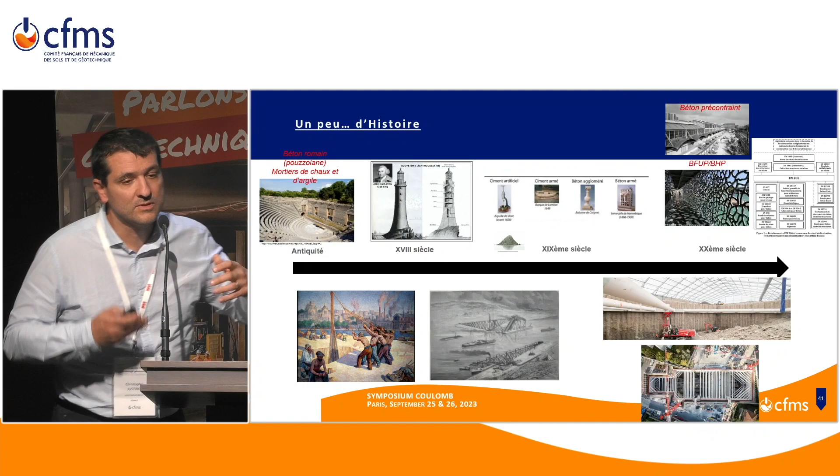Okay, le béton, Roman Empire concrete. So you might have seen that. So I saw - rather than speaking about history, just saying that I've been spammed by all my colleagues because they know that I'm head of materials for Soletanche, and they say, but why aren't we using this self-healing Roman concrete? Is it something new for us?

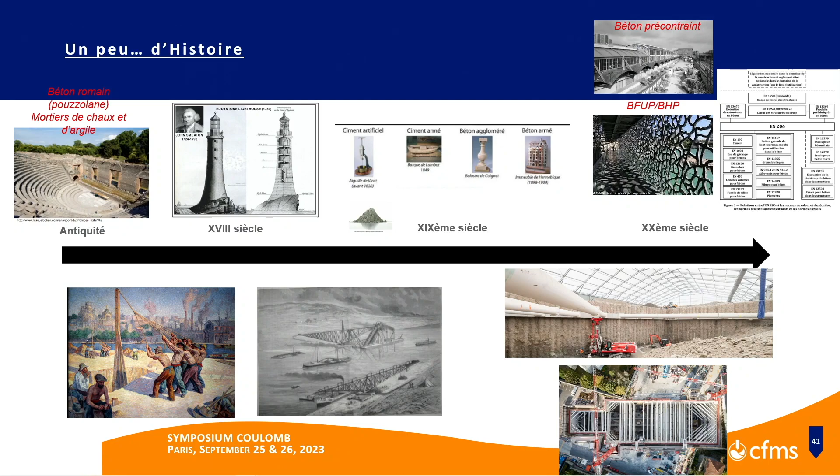So I wanted to take the opportunity to say that yes, Roman concrete was very durable because we can still see the structures. But in all the articles that I've seen about that, there was an important mention. It's saying that nowadays the concrete we are using is more durable than Roman concrete, and this is for all the reasons I'm going to show you, because there are standards, there is specification on concrete. So yes, Roman concrete was very good.

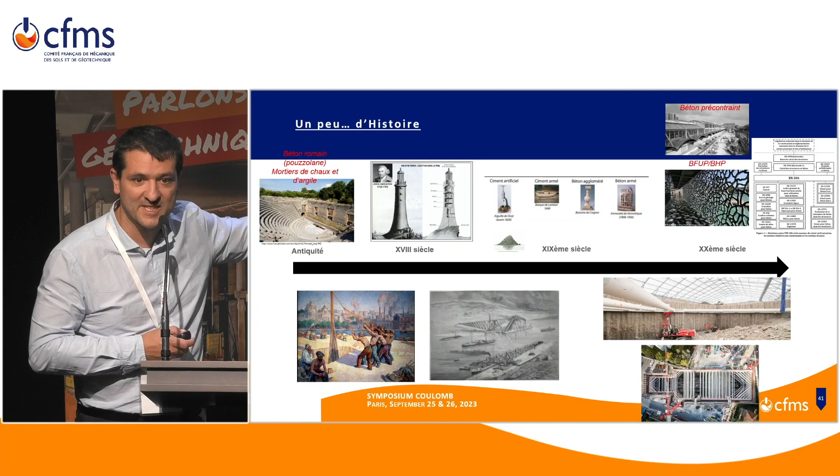It was in a way not using Portland cement because it didn't exist, but it was using the same principle - quick lime, pozzolan, all the kinds of things that we are using now. It was not necessarily lower carbon emission than what we are using, but it was interesting to say that it exists. Astonishingly, between antiquity and the 18th century, there was no concrete, let's say.

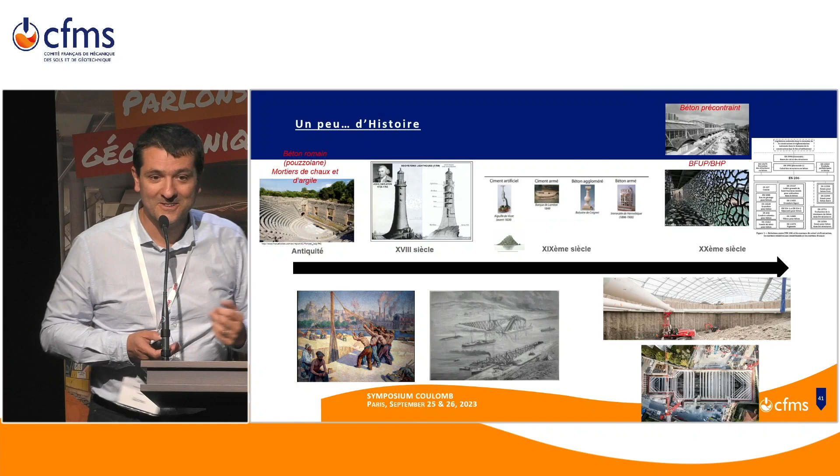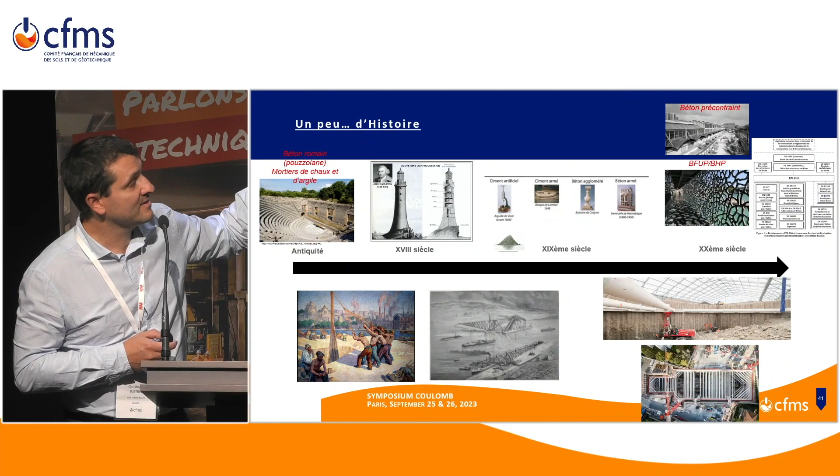It was rediscovered. And the discovery of concrete obviously allowed a lot of development up to now - pre-stressed concrete, very high performance concrete that allows us to do retaining structures with reinforced concrete, going very deep.

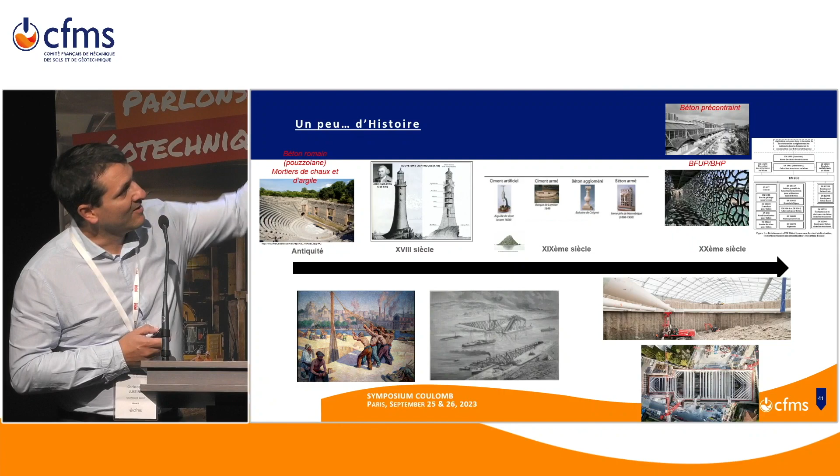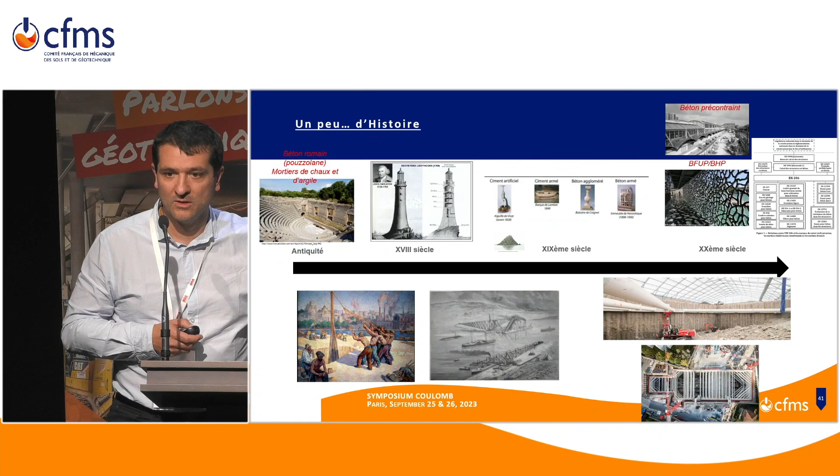And the last thing that is like the chart is what I wanted to do - keep in mind that concrete nowadays is governed by specification. There are a lot of standards on all the constituents for concrete. And that's also the reason why we can now produce more durable concrete and higher performance concrete.

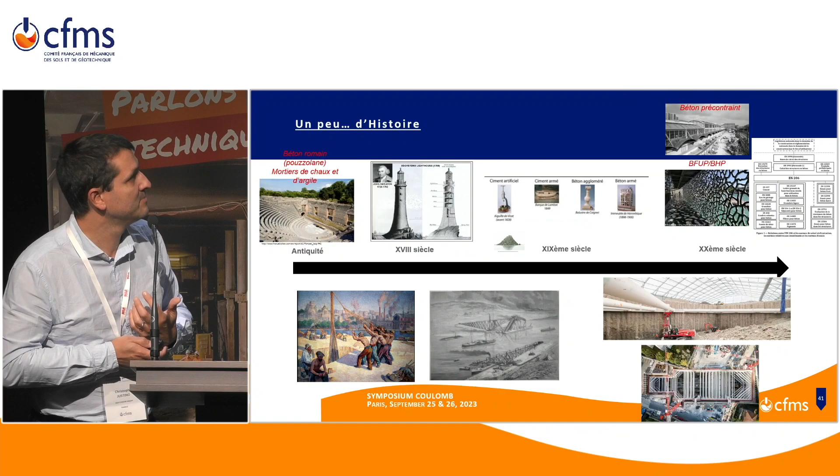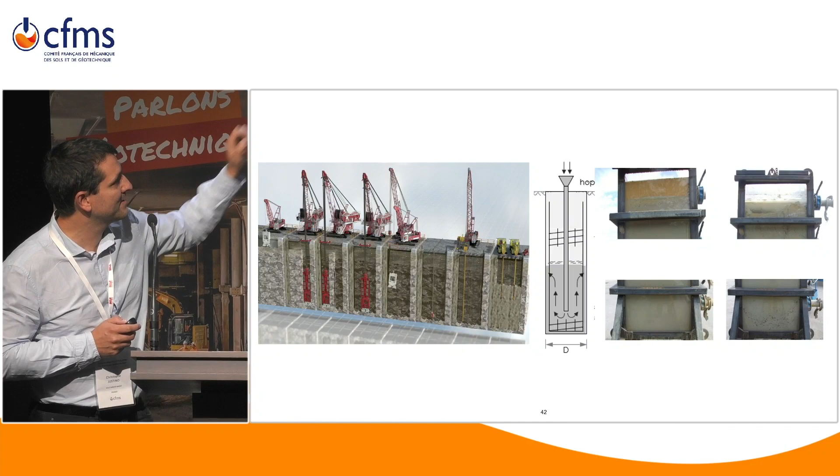Okay, so now if we go to concrete in geotechniques, in order to explain why it's so specific, concrete in geotechnique, we need just to go back on the way we pour concrete. So we have some slides just to re-explain. For those who are not specialized in this kind of diaphragm wall deep foundation concrete, once we have used the magnificent tools, hydrofraise, grabs, in order to go as deep as the project requires, that we have perfectly controlled the support fluid with the nice equipment, and that we have put in place the reinforcement into the trench.

We use a tremie pipe that goes at the bottom of the excavation, and we pour the concrete from the base to the top. So that requires, as it was explained by François, that the concrete that we are pouring needs to maintain its workability, its fluid properties, for a certain amount of time. You mentioned 10 hours. We have examples of projects where we had pours that could last for 18, 20 hours to pour 1,400 cubic meters in just one lift. So that means that the concrete has a very high requirement. On top of that, we are blind because we are pouring concrete under support fluid.

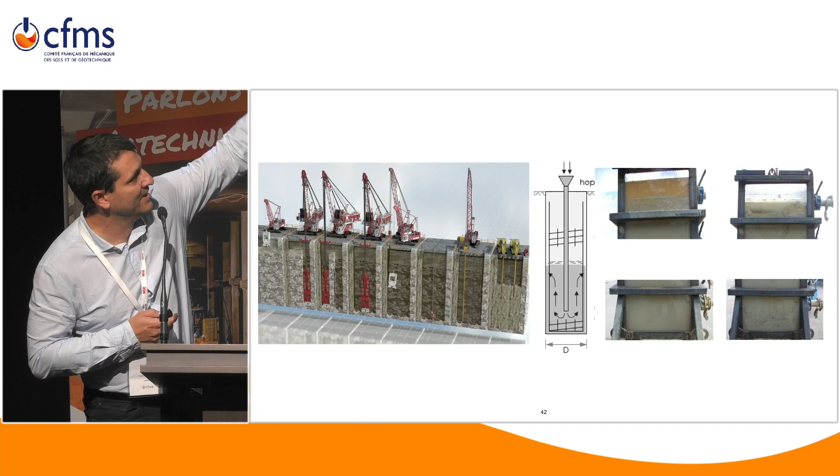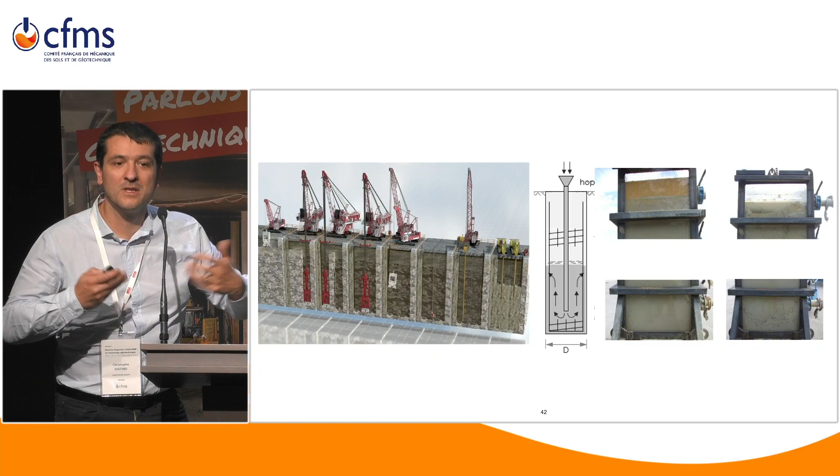So it's just an overview of what can happen. On the left side, we have what happens when everything is perfect. You can see the transition between the support fluid in brown and the gray concrete. But if we are messing with the properties of the concrete or the way we pour, we have an intermixing. The concrete is washed out at the base, at the top, and it leads to defects. The problem is that in that case, the defects will only be seen when the box is excavated, and you can imagine the impact on repair. So that's why concrete is an essential part of the success of those projects.

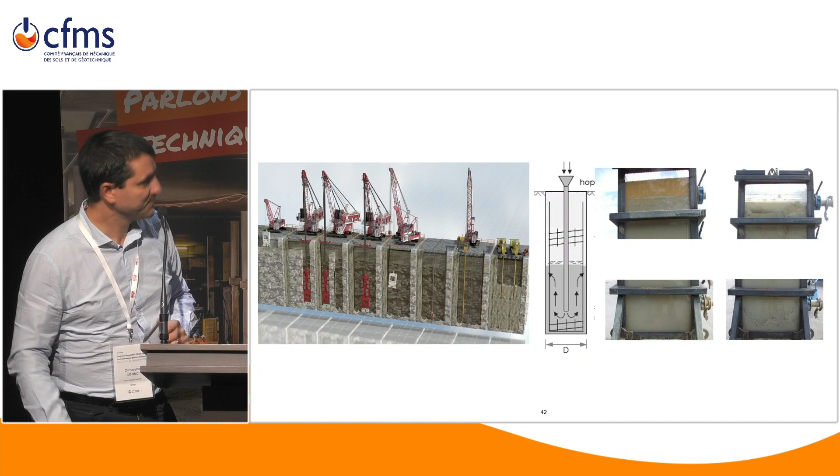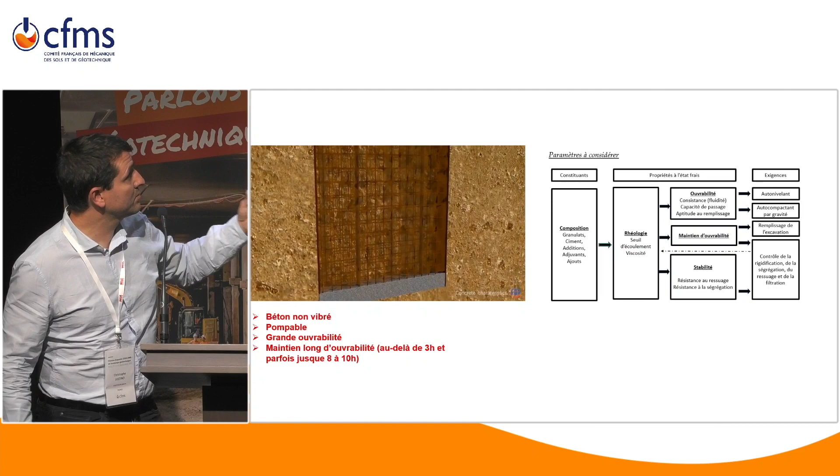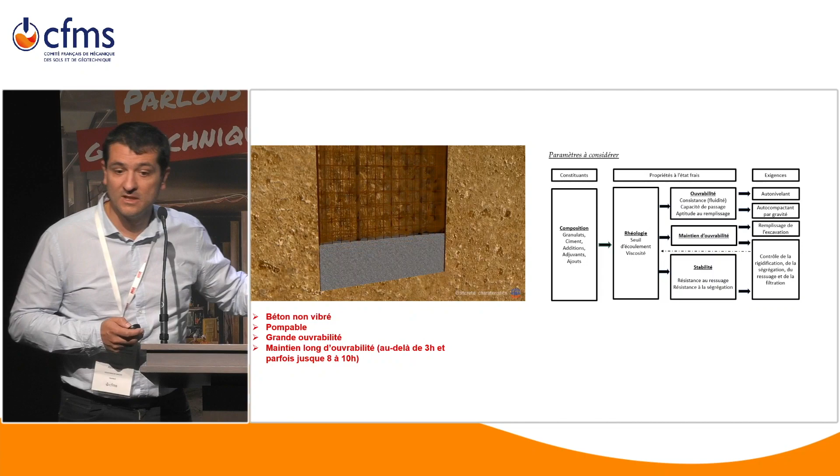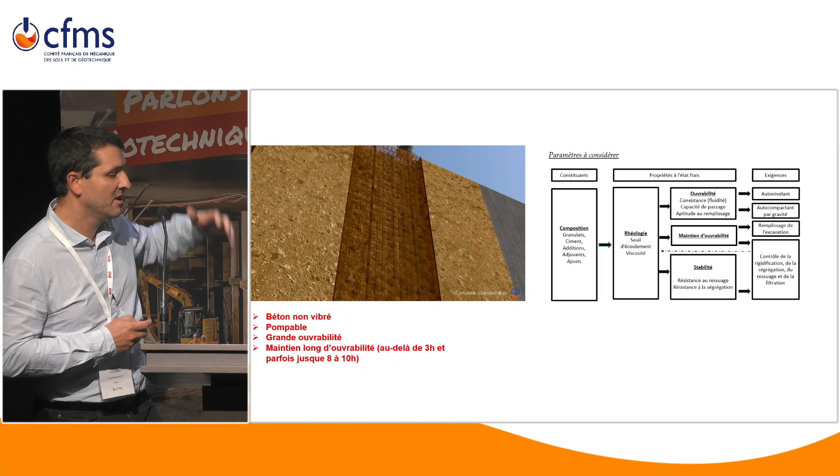Okay, and just to emphasize, just a view on how the concrete is poured. So this kind of concrete has to be close to self-compacting concrete. It has to self-level. It's not vibrated, which is not the case for civil works. We do not vibrate. It has to be pumpable, very workable. As I said, we need to maintain its workability from minimum 3 hours, but up to 10 hours in some circumstances.

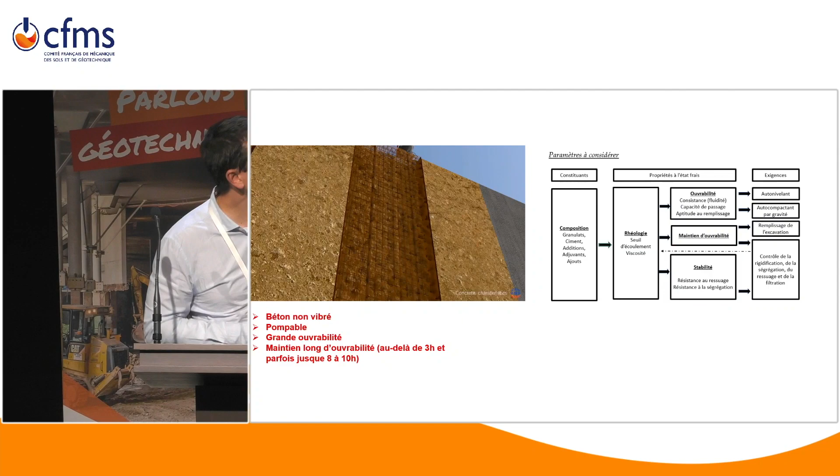So in order to do that, we need to deal with obviously the constituents of the concrete, as for every concrete, so we're still dealing with aggregates, cement, cementitious materials, admixtures, and we need to consider different aspects of the fresh properties. One is the concept of rheology of concrete. There's a need to understand perfectly the physics behind the rheology of concrete, meaning that it's a mix between what we call the seuil d'écoulement, the yield stress of the concrete, and the viscosity of the concrete. With the concept of rheology, we can access the consistency, the workability retention, and another key parameter

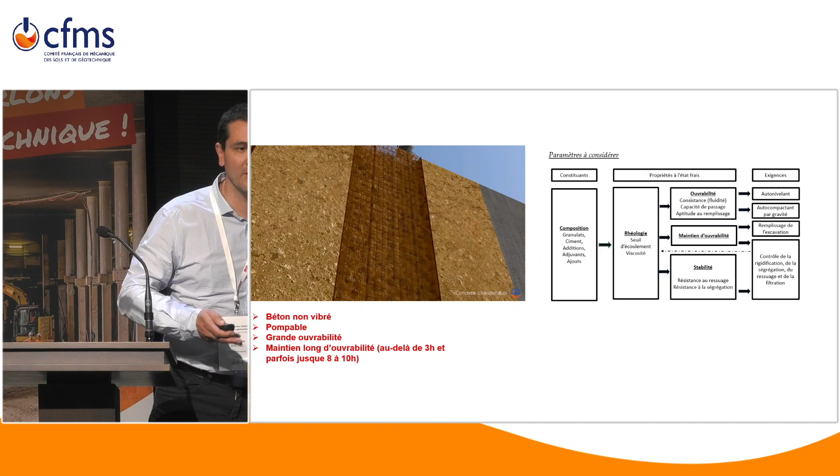that was not really a focus before 2000, which is the stability. Imagine you have 70 meters of fresh concrete. There is a lot of pressure under the concrete, so concrete tends to bleed. Some water of the concrete tends to go out, but under pressure, it can do massive damage if the mix design is not balanced properly, and we can have these very high channels of water coming out of the concrete, washing out the concrete, and impacting its durability.

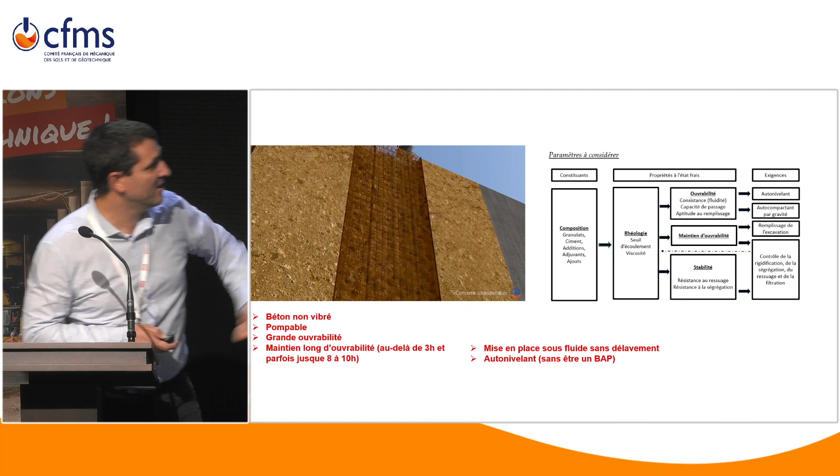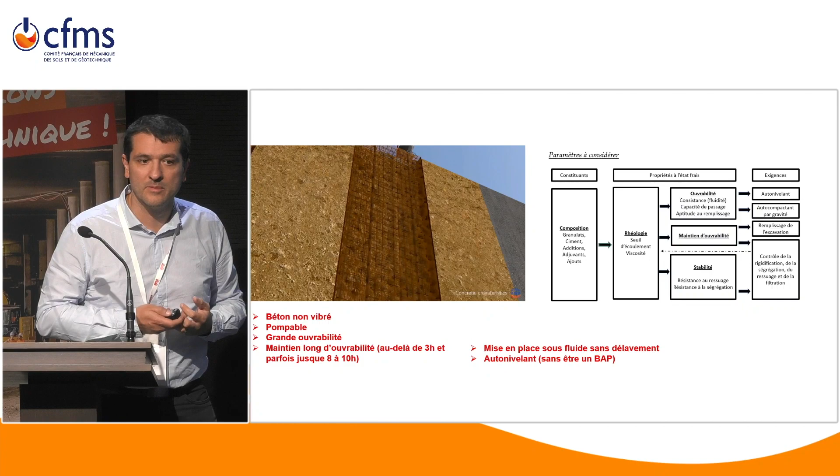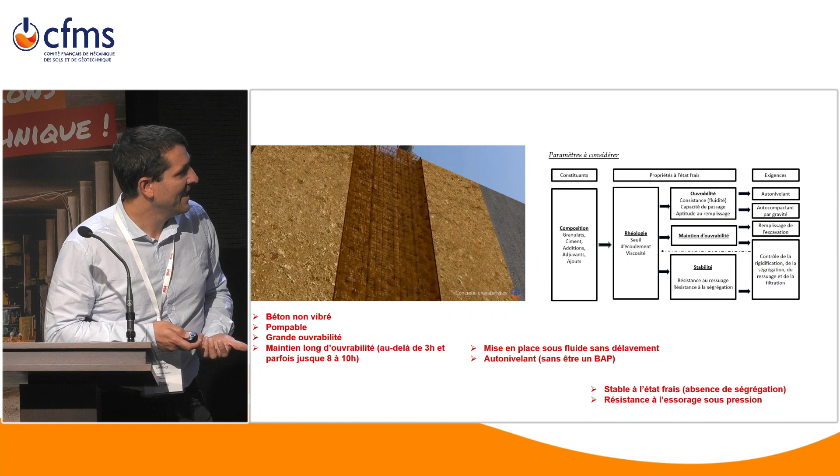So with that, we need to have a concrete that can be placed under a support fluid without washing out, being able to pass through reinforcement that is more and more dense due to the high requirements of the project. More and more we have to have concrete able to pass through very dense reinforcement without vibration. And it has to be stable, as I said, and resist pressure. So there are a lot of constraints that can't be dealt with by what I would say traditional concrete. Sorry for the mic.

Okay, so generally it's well accepted that before 2000, it was really typical to have what we call three-component concrete, meaning that the properties of the concrete were driven by the dosage of cement to get the strength, by the water content to get the fluidity, and the balance between gravel and sand. In order to face the challenges of more durable concrete, more flowable concrete, higher strength concrete, the industry has moved to what we call generally five-component concrete, where we enter the era of admixtures.

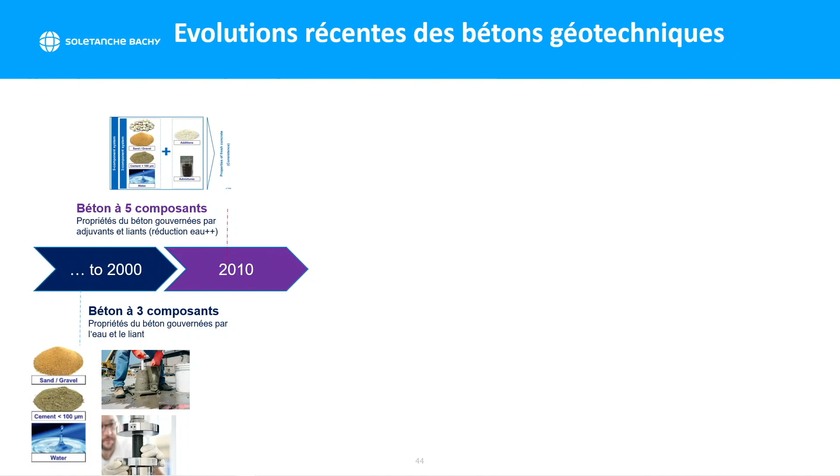And the admixtures help to reduce the water and get higher strength. But at the same time, by reducing the water, they give you concrete more sensitive to variation. And as the concrete is more sensitive, especially for geotechnical concrete, it was not enough to just test what we call the slump and the strength, because it was not enough to fully characterize the concrete that we need to pour at 70 meter depth.

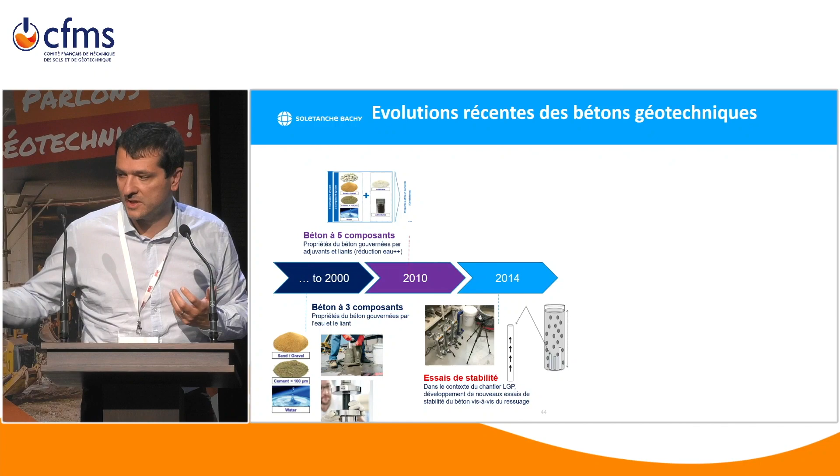So since 2010, a lot of development has been made through different standard committees, through technical working groups like the ones led by the EFFC, in order to develop new tests, first to characterize the stability of concrete. So we'll see that tests have been developed to measure the ability of concrete to retain its water.

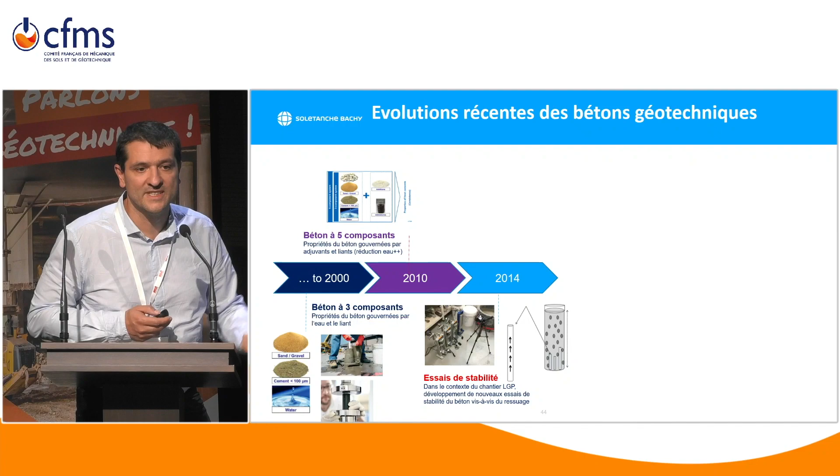Also to have simple tools on site to control the viscosity, because we cannot use a rheometer on site. It's a good tool for laboratory, but on site we need other tools. So just by using simple tools that I'm going to detail, we are now able to characterize the yield of the concrete and the viscosity of the concrete.

At the same time, we are more and more challenged about durability requirements, so we need also to develop tools to explain how the concrete places itself in the soil. So we have more and more numerical modeling of the way the concrete places itself, in order to answer one of the fundamental questions of pouring concrete: the first concrete that I'm pouring at the base, will it go up to the top, will it stay at the base, or will it mix with the other loads? Through numerical modeling, we have been able to approach that and rationalize it.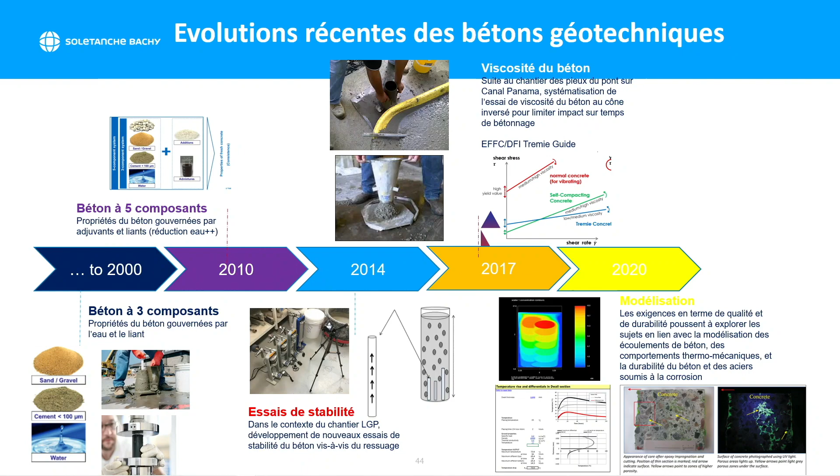And typically, for the pours that were lasting 20 hours in London for deep shafts, we never used a concrete with 20 hours of workability retention, because it would have led to a huge problem in terms of setting time. But we were able to do a 20-hour pour with 8-hour workability retention concrete, and we demonstrated that it was working through modeling.

Another issue: we are speaking about 2.4 meter D-walls, for example, in Japan. So that means that in geotechnical concrete, we are facing the same issue as mass concrete. The heat of hydration of the cement can build high temperature within the core. So there was a need to develop modeling and numerical tools to predict and also to control on site the temperature in the very large pours.

So just imagine, when I arrived in 2005, the only thing we were doing in concrete for D-walls and piles was a slump and cylinders to test the compressive strength. Now in France, most of the contractors are using at least 5 different tests on concrete. If you go to the UK or other countries, sometimes you have a list of 10 tests. Not saying that 10 is too much, but the 4 or 5 that we have retained and put into standard in France are really a change and help to increase the quality of the concrete we are building.

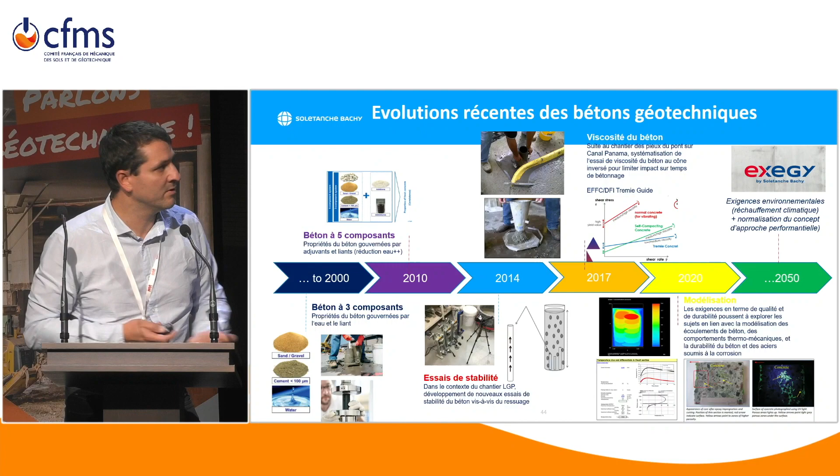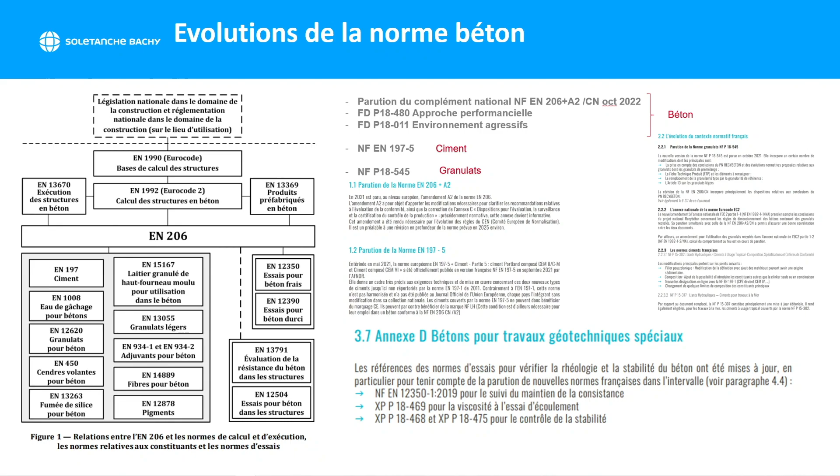So the next part is very quick, it's just for you to follow up. Important to understand, we are not going through all this, but know that the concrete standard national annex has changed this year. The main change in this national annex is introducing the possibility to use recycled aggregate from concrete deconstruction and to use the performance-based approach to design concrete, meaning that your concrete mix design will be validated based on durability testing and no longer on the minimum cement content or maximum water cement ratio.

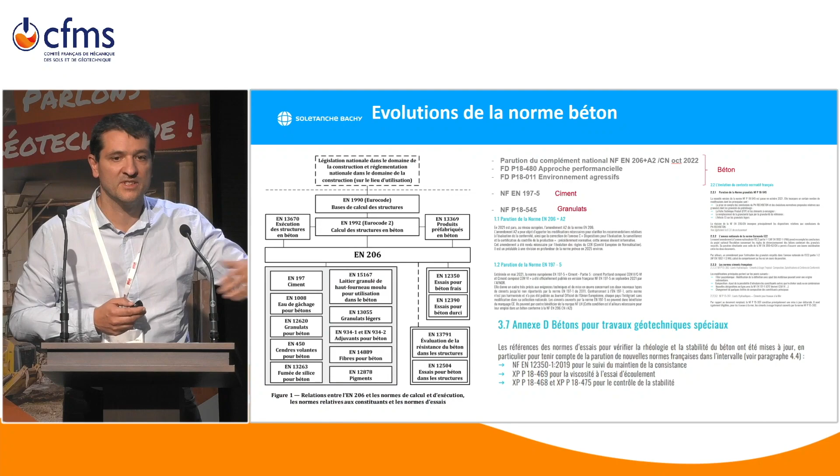And specifically for geotechnical concrete, we have added the additional tests that have been passed into standard. And those tests mainly are the flow table, the slump flow, which allow you to have a direct vision of the stability of the concrete, detect whether or not the concrete is segregating. The flow cone, which is something like the Marsh cone for grouts, just measuring the time to empty an Abrams cone to get a feel on the viscosity of concrete.

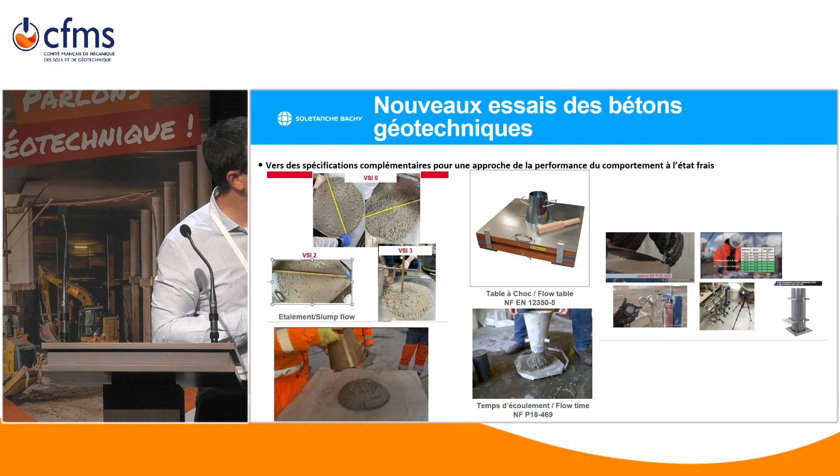It's a major impact because above the limit value that we have, generally, it can change from, let's say, discharging an 8 cubic meter truck in 5-10 minutes to discharging an 8 cubic meter truck in 30 minutes, 45 minutes, just because of the viscosity of concrete. So those are important tools.

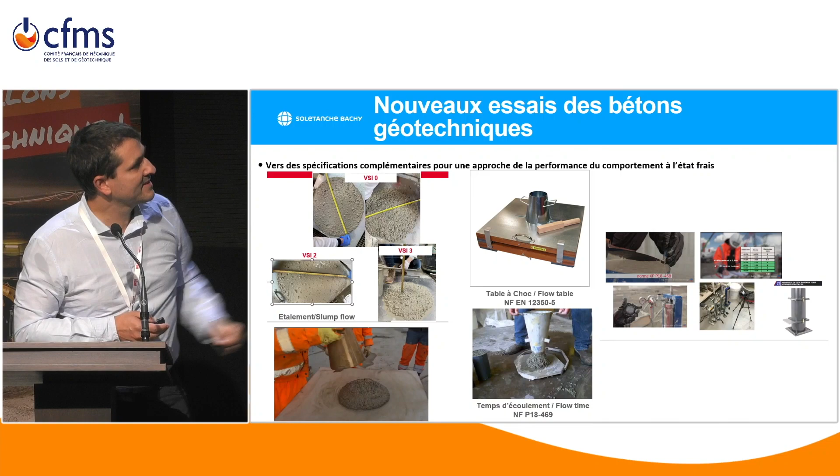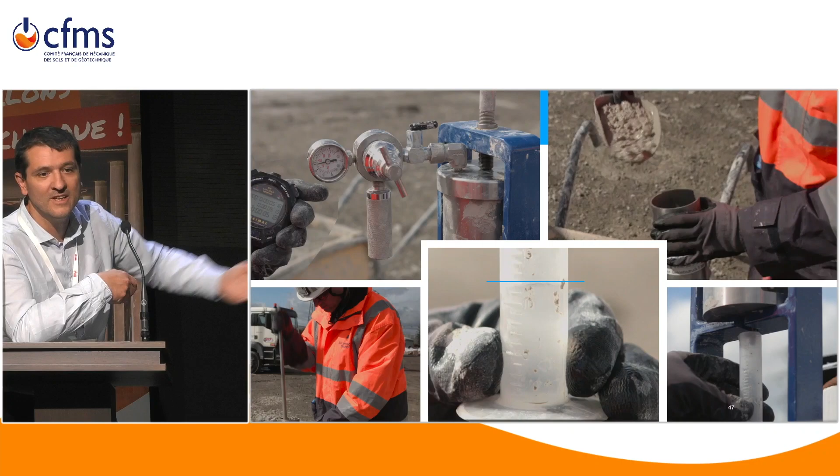Stability test, bleeding test, that helps you to measure the ability of concrete to retain its water. So in more detail, for stability, we have a filter press test; it's a very simple cell that we put into pressure, and we have a threshold value of the maximum water that should be let out. It's a very simple test that lasts 5 minutes.

A test that lasts a little bit longer because it's at atmospheric pressure, but very interesting to identify the potential for bleed channels. Those tests are typically tests that are recommended to be done before the project starts, when we do construction trials. It looks very simple. It's very simple, but it really can change things on concrete.

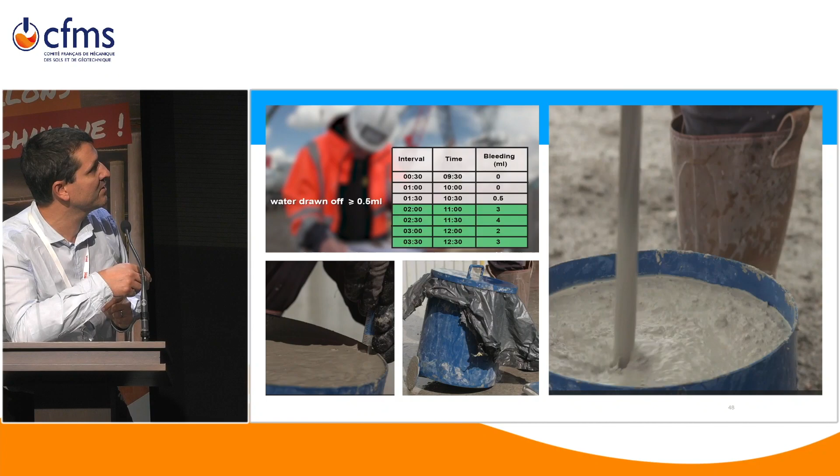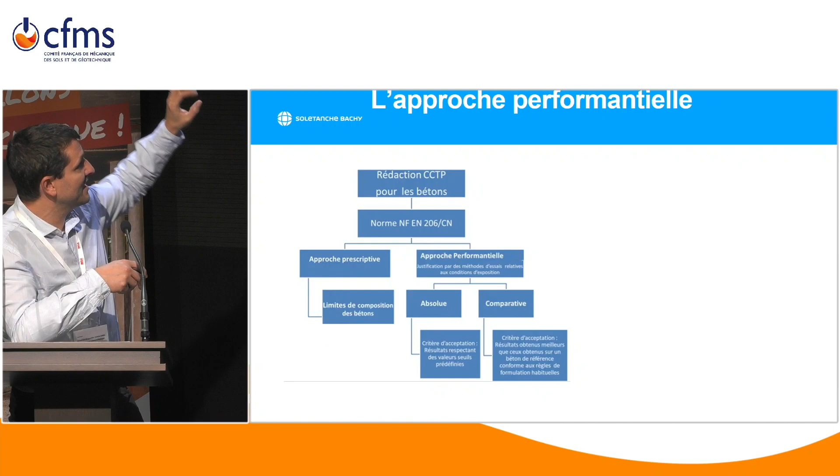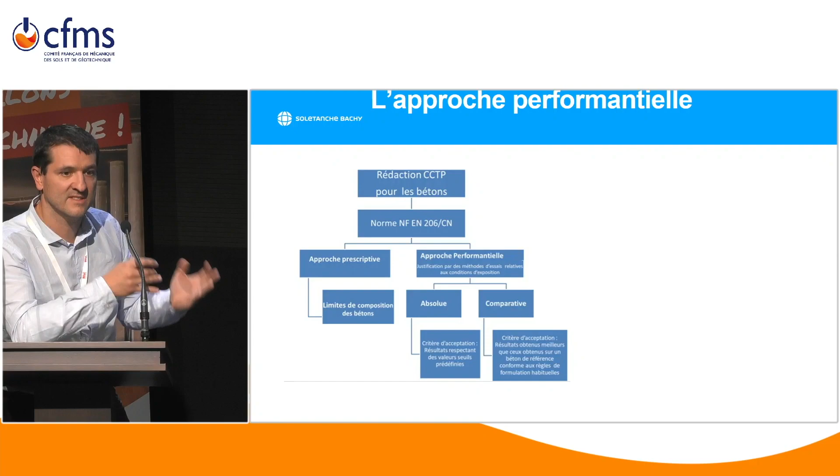The performance-based approach, it's another step. So as I said, now when you design a concrete according to the concrete standard for structural concrete, you can decide to go on the prescriptive approach. But if you want to optimize your mix and try to reduce the cement content in your concrete for economical reasons, for technical reasons, for example, for a sustainability approach, there is now a framework that exists in France, and France is one of the first countries that has built documentation, a standard that allows you to go in this direction.

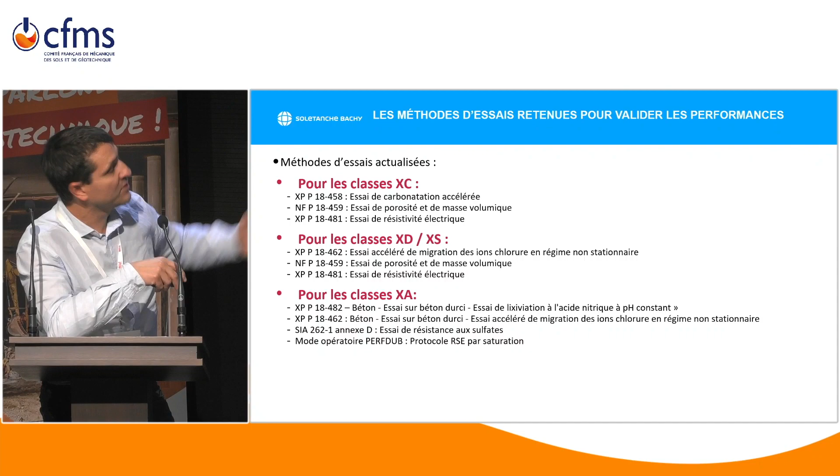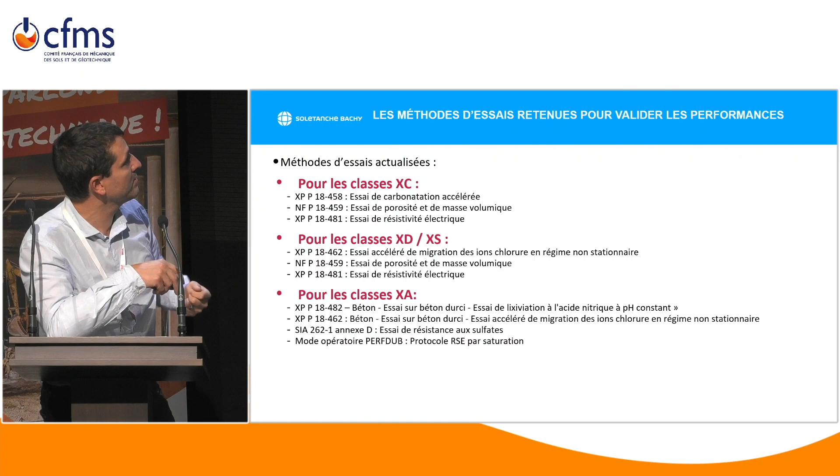So I'm going to explain: for each of the exposure classes that you are facing, you will have a dedicated test with an associated standard. For carbonation, we have accelerated carbonation, porosity, resistivity. For corrosion due to chloride, there is a chloride migration test.

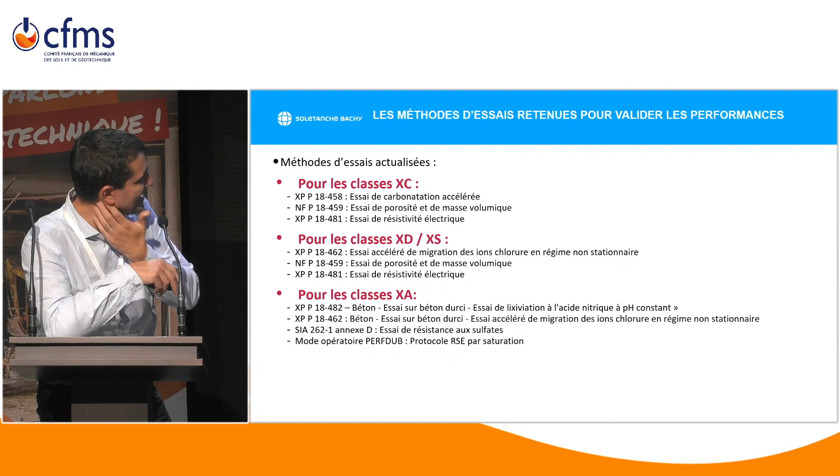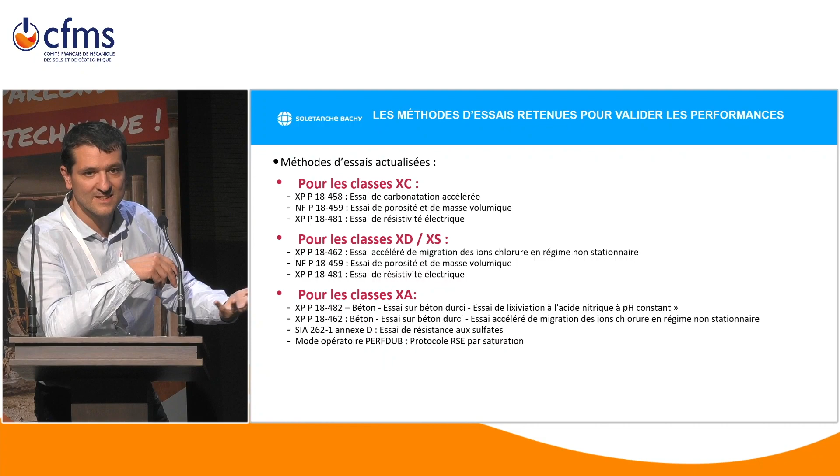And even for chemical attack that we are always facing in geotechnical concrete, because we are in the soil and most of the time we can have sulfate from the soil or things like that, we have those tests to test the risk of low pH or the impact of sulfate in order to demonstrate that the alternative mix, which is, let's say, optimized from the prescriptive approach, will give you the right concrete for your project. Okay, so that's just to show how it works.

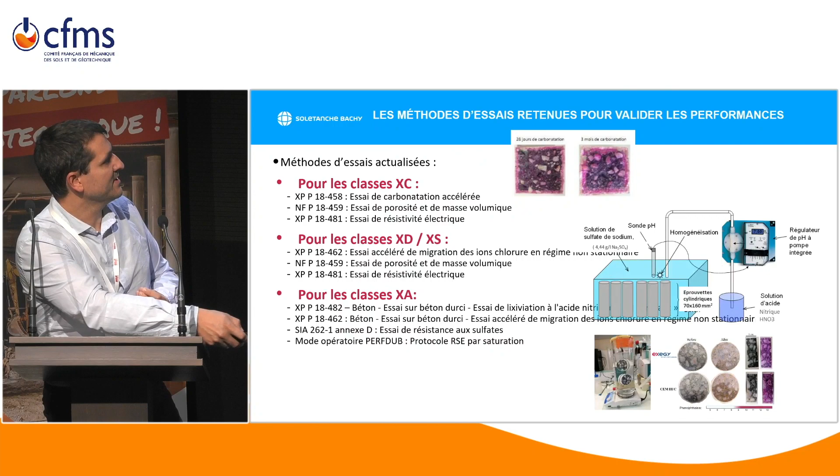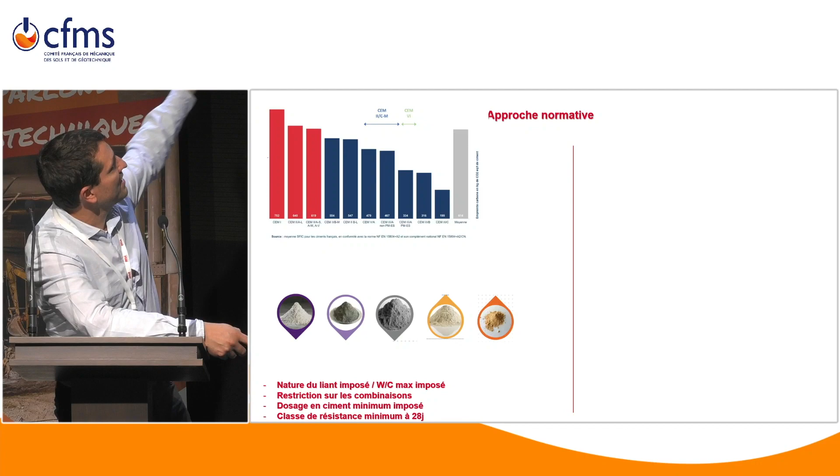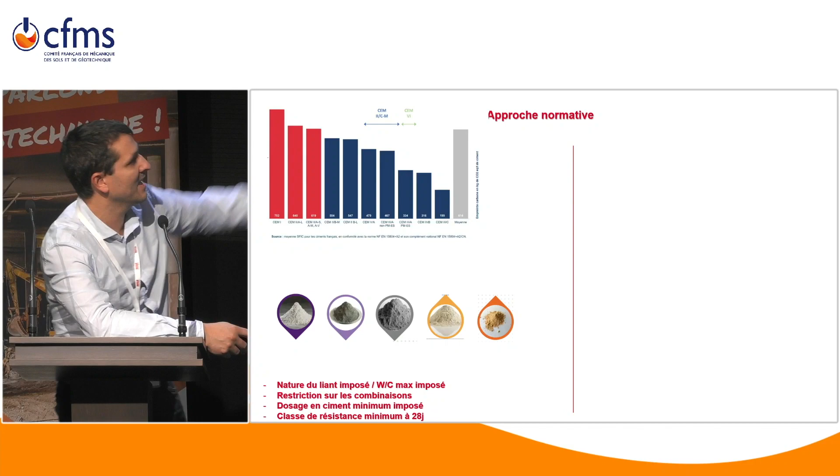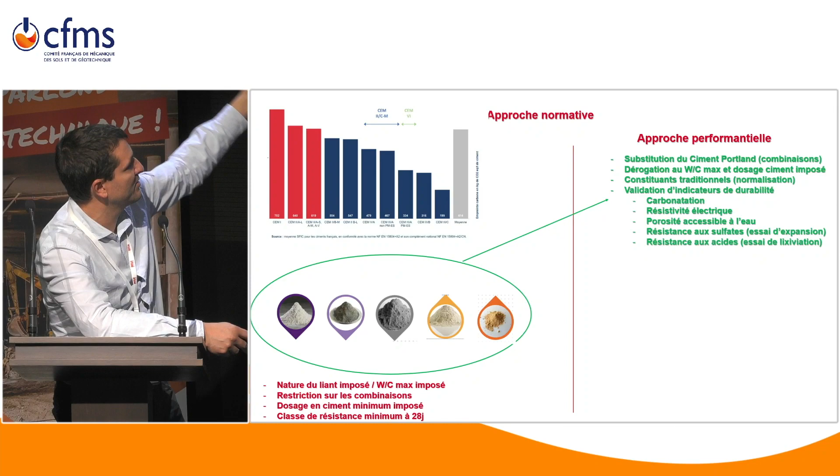Okay, so just to emphasize the interest: normally we can use the normative approach. We have a range of cements, but the binder content is imposed, the water-cement ratio is imposed. There are restrictions on the replacement that we can use, all those cementitious materials like slag, fly ash, silica fume, calcined clay, limestone filler. We have limitations. Now with the performance-based approach, we have much more room to play on the replacement of standard cement with those additions, and it allows you, through validation of durability indicators, to build a new mix design.

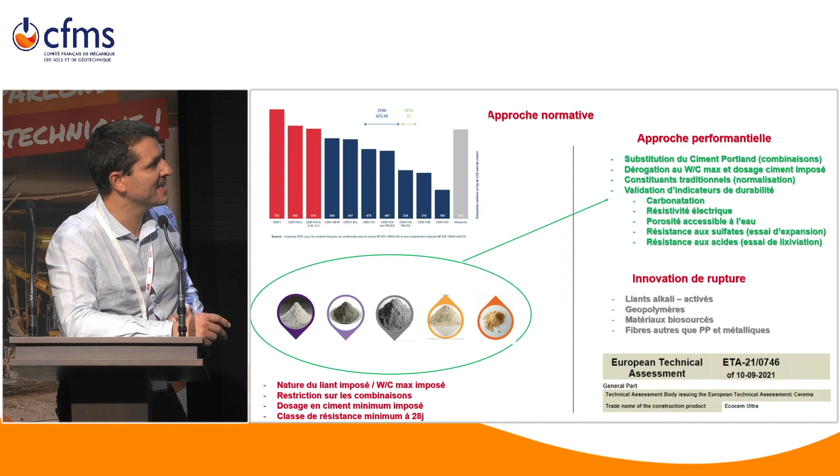Apart from that, there are a lot of new innovative components for concrete. Need to keep in mind that at this stage, they are, let's say, not according to standard. So using those products needs a European Technical Assessment. But there is a start, even in geotechnical concrete, to see alkali-activated geopolymer concrete being used.

Okay, well, this one is for you. I will just finish by keeping you informed of what is going on in terms of concrete. It's how complex it gets, but we went from a prescriptive approach; in 2022, we released the performance-based approach in the standard. And in the work now being done at the standard committee for concrete, there is a group of experts working on what we call low carbon solutions. And it's in interaction with Eurocode 2, with the standard committee.

And the idea is to identify all the steps that we need to climb, let's say, or to pass in order to continue to decarbonize the concrete industry. That's giving a framework to new materials that have a lower carbon footprint than Portland cement. That's giving a terminology, a way to define what is low carbon concrete to avoid greenwashing, for example. And also linked with the Eurocode is how to not just focus on the concrete material itself, the mix design, but the overall structure. So those are the next challenges for the future.

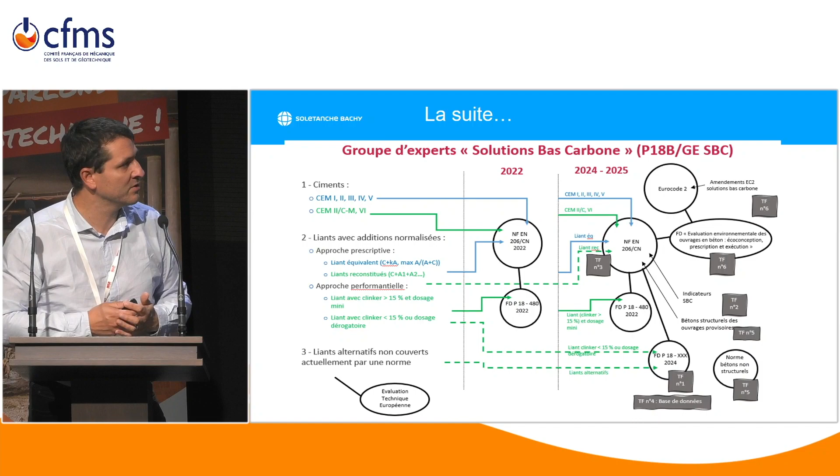Thank you, Christophe. Well, hello. Yeah, works. Good. So, any questions there? We have our specialist question. You know the name? He's got a question anytime. Yeah,

thank you. I'm just curious. What is the ideal relative density between the mud and the cement? The standard explains. Yeah, so sorry. Or the standard, yes. So, in reality, when you go back to the old documentation, it's not really the difference of density between the mud and the concrete that matters. Though the maximum density is 1.15, in some occasions we can relax to 1.20.

But there is this document from the early 80s explaining that what is more important is the contrast between the yield of the concrete and the yield of your support fluid. That's what is more important, because you need to ensure that when you pour the concrete, this concrete has enough strength to put in motion the support fluid. And it's not a matter of density, in fact.